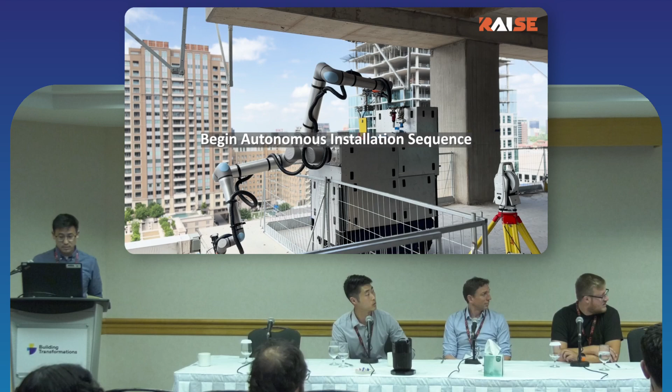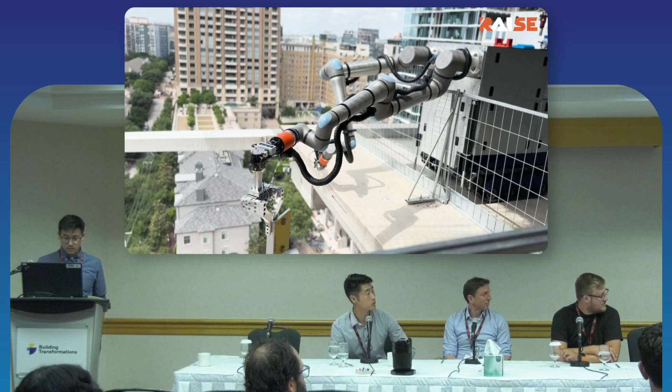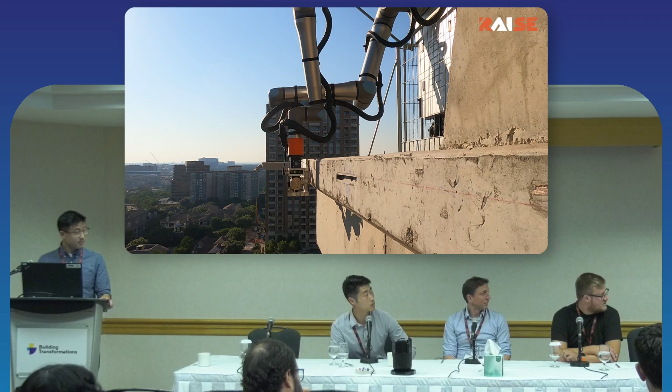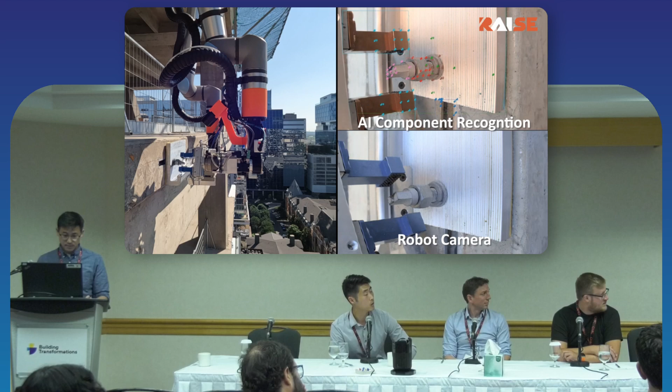With the robot, this is the first application we developed: installing brackets at the edge of the building. This is one of those applications that puts people at risk of fall danger, and it also greatly slows down the work as a result. The robot operates fully autonomously in this video, so none of this requires human intervention. It's able to install these brackets, do all of the fastening, and then torque them down to spec, all autonomously. We use machine learning and AI in the manipulation part so the robot can see what it's doing as well as perform the motions correctly, especially motions with very tight installation tolerances.

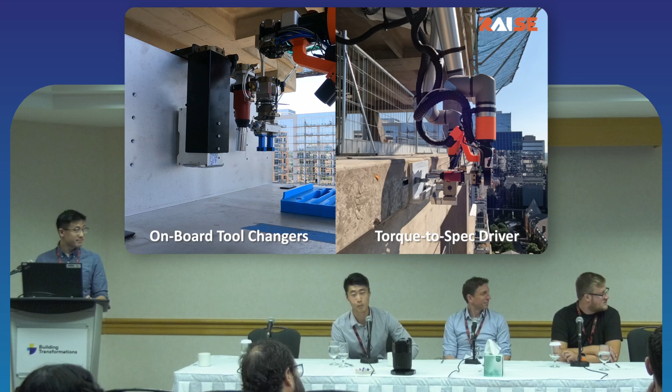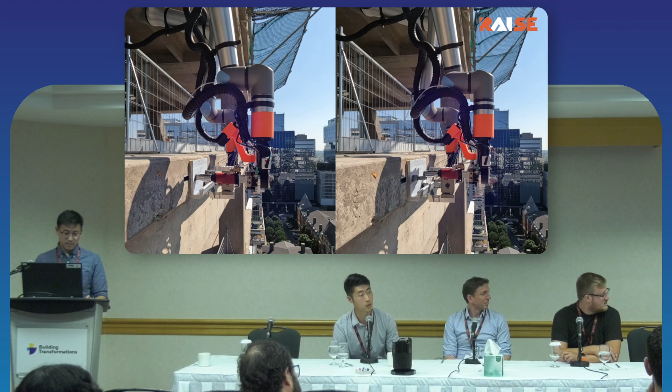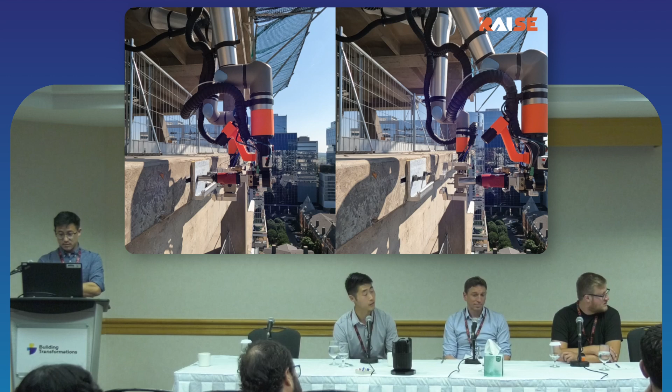Our robot also has a nice toolbox on board, so it can use a variety of end effectors to do the work. It has parallel grippers to manipulate components, a torque driver to torque nuts down to spec — we can torque up to 80 foot-pounds — and we also have a printer on board to do layout afterward. This is something our customers have highlighted as a very nice feature, so they can know where the brackets are installed and install the panels in the right place. I'll just let this play out for a couple seconds.

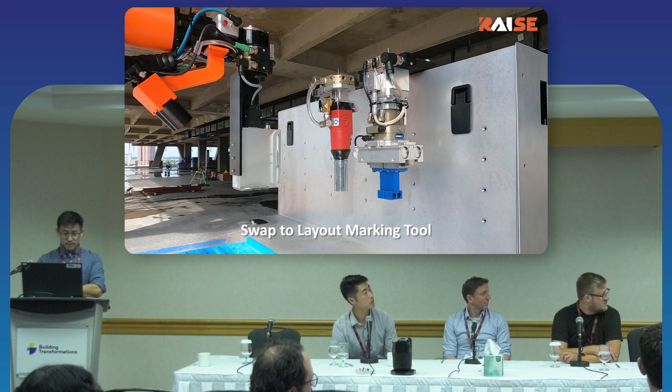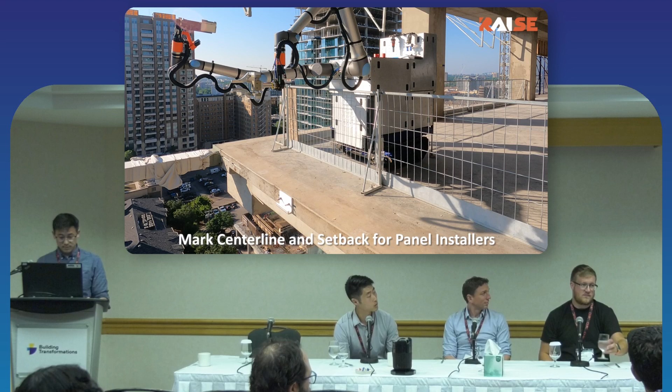All right, and now you can see the printing. After the job is done, or actually during the job, what we can do is generate installation reports for our customers. You'll see here there's a little CSV that we give to our customers while the job's being done. This allows them to see

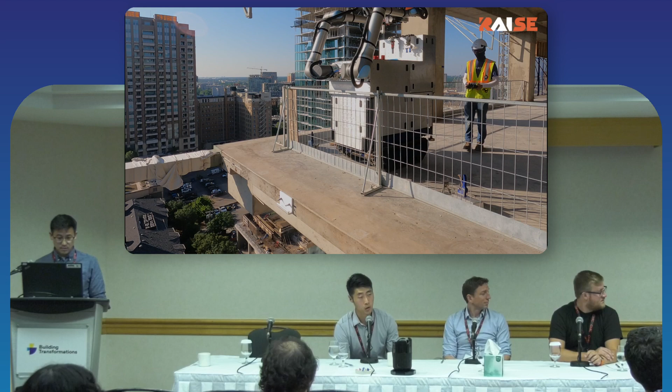deviations on the building from drawings in real time. That way they can start getting ahead of rework as soon as they're discovered, instead of having to wait to do the installs and discover it in the process and have to fix a lot of stuff. And that's all I have to share.

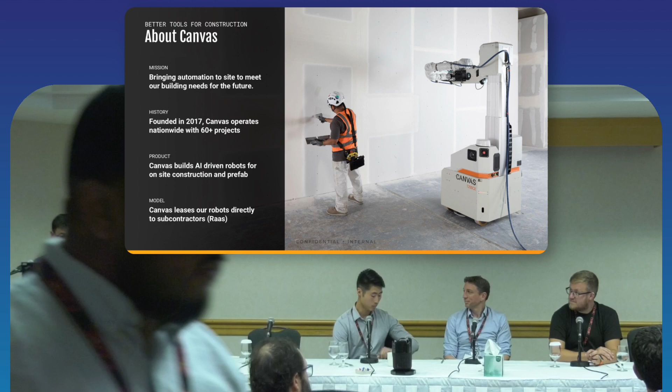Awesome, thanks. Kevin, you want to go? Yeah. Hey everyone, Kevin Albert, co-founder and CEO of Canvas, also a company out of San Francisco.

Canvas focuses on bringing automation to the construction site to help install materials on site. We focus on the interior trades, whereas in exteriors there's a lot of heavy machinery like excavators, backhoes, cranes, things like that. But in interiors, most of the work is still done predominantly with hand tools at this point. So we're targeting those trades.

Our first market is drywall finishing. That's the step between hanging boards on the wall and when you paint them. It's what we've found to be one of the most labor-intensive trades in construction, because workers have to keep coming back to the wall in 5 iterative steps to apply compound on the wall.

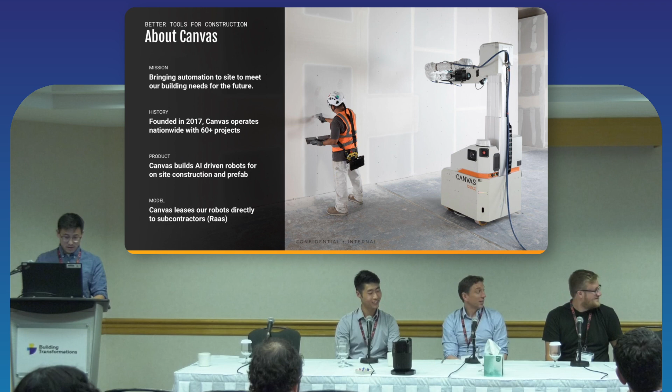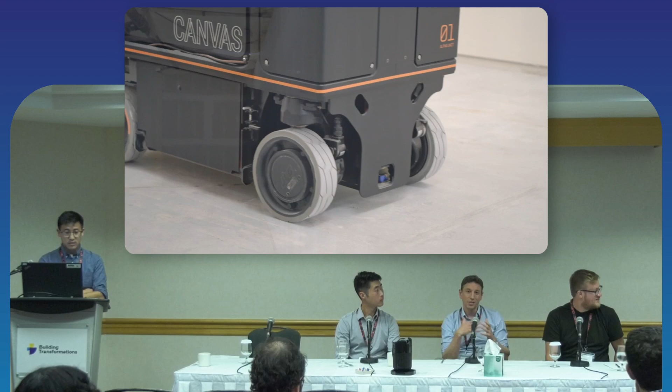But yeah, to get a sense for the way it works, we actually use the accuracy of the robot to really reinvent the way the trade is done. Typically this takes 5 days of iterative application of joint compound to take a wall from a panelized system to a flat surface. The machine automatically scans the environment, so we don't need any BIM, any plans, anything at all. You can pull it in and go today.

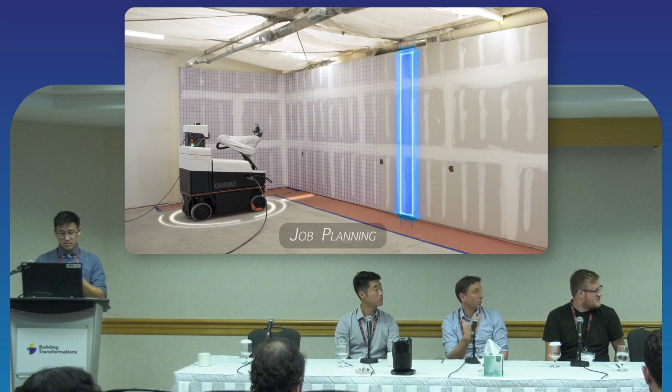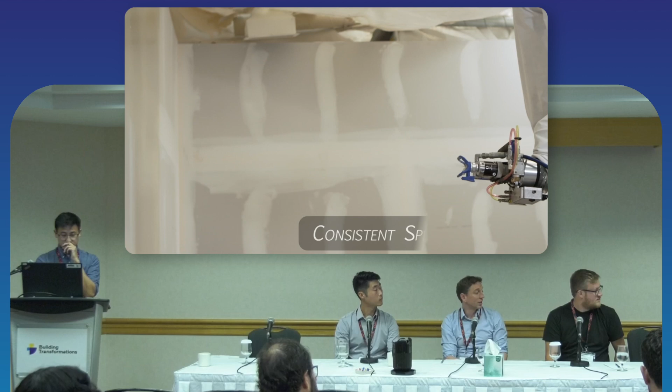It identifies using AI all of the features and seams on the surface and plans out workspaces for the machine to do. The worker can select which workspaces they want, and then the machine goes and applies all of the compound in a precision layer in one shot. So this is 4 days of application for a manual application getting done in 1 day.

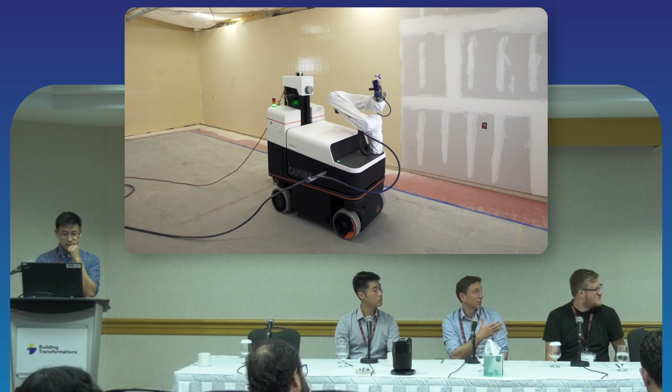We let that dry for 1 drying cycle overnight, put a sanding head on the same machine, same process, and it sands it back to a final finish, fully vacuum capture, so no dust in your environment, completely clean, taking a lot of the burden off of the worker's body and allowing them to basically drive this machine.

And then in real time, we capture all the data that's happening. So this not only helps coordinate projects, it gives us deep insights on exactly what their workflows look like, so that we can give them insight and help them understand where they're losing efficiency, where they could be more efficient.

And then finally, it allows us to do data-driven customer support and continuous training on systems, so our engineer or tech support can be on a Zoom interface at a moment's notice for all of our customers. So that's basically how we've created a platform that now can bring heavy machinery into the interiors and bring automation to a lot of the trades that still haven't gotten to that.

Awesome. Yeah, that's super exciting, especially with the data collection and feedback back to the reporting on site and how it's doing. So we'll have one more introduction, and then we'll start going into some of the questions that cover different challenges and issues. So, Scott.

Hi everybody, my name is Scott Fairley. I'm the founder and CEO of Optimotive. We're a Canadian robotics startup focused on the enablement of automation in what I like to describe as muddy, dusty, and otherwise unpredictable environments, like a lot of you guys find yourselves in. Our primary bread and butter is construction. We built a data collection robot, obviously data being a hot topic that's been discussed a lot here today.

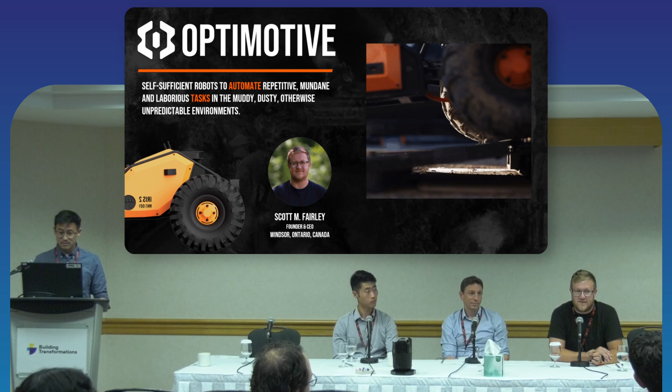Think of data as the new oil, and we're almost like the oil extraction rig - how do we get that data out from the field? We built a mobile data collection robot named Iris. Maybe you've had a chance to check it out upstairs. It's a wheel-based platform, really targeting those heavy civil builds, think airports, military bases, and things of that nature. So obviously really expansive job sites.

If you're trying to go out and build like a Tim Hortons franchise, for example, if there's any Canadians in the room, it's not all that big a deal to go out and capture data on one of those sites. But when those sites start to scale in size to the hundreds or thousands of acres, data capture becomes a real pain. So we built our little robot to automate that process for our customers.

It's something from the Olympics - I was a huge fan of Rock'em Sock'em Robots as a kid, so obviously boxing was a fun one to watch for me.